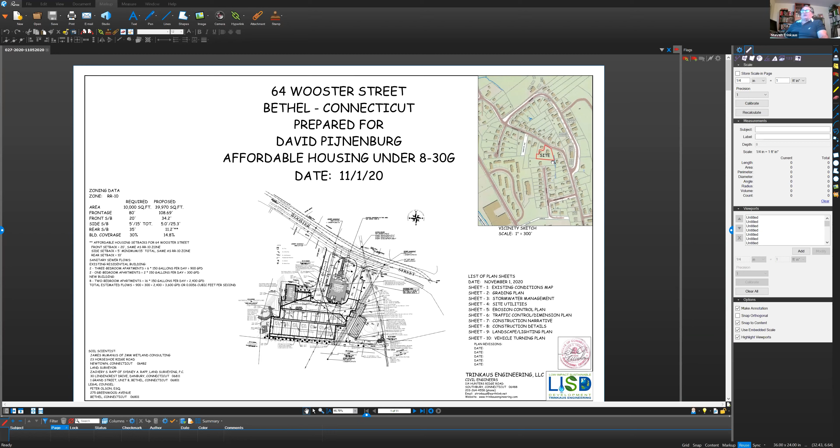Going to the existing conditions map, all the base surveying was done by Sidney Rapp Associates. Based on prior applications for the town of Bethel, we had provided the signed sealed electronic copy of the map. One of Wright Pierce's comments was to provide prints of that plan, which we're happy to do, along with a response to their comments and David's comments. So we have the single family house in the center northern end of the site. The garage is near the western property line. A driveway comes in to the garage and a little bit of pavement to the back corner of the house. The majority of the area, except for a little old concrete foundation remains, is lawn area.

There is a sewer easement that runs through the site from Wooster Street to a manhole west of the site. And that easement is as of record. There are some outcrops of potentially rock on the extreme northwest corner of the site. We had Jim McManus, a certified soil scientist of JMM Wetland Consulting from Newtown, look at the site to determine if there were any wetlands along this intermittent stream corridor. There are no wetland soils. It is simply the intermittent watercourse or drainage ditch through here.

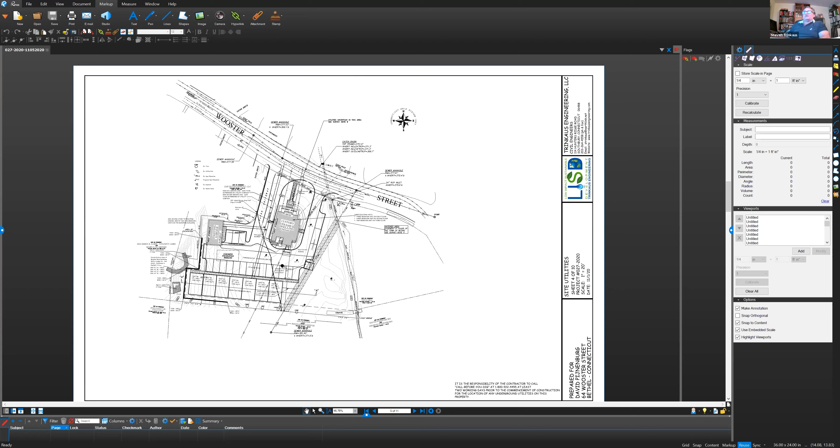With the sanitary sewer line being on the site, we're going to be running our sanitary lines, obviously, from the existing sanitary line at two locations, as that makes the most sense, instead of coming in from Wooster Street. We have a comprehensive erosion control plan.

The stormwater detention area is here. For the ease of reading, we didn't show it, but we have the Filtrexx sock below that. We have sock below the riprap outlet. There is also another sock along the 3 parallel parking spaces here. We have the construction entrance. We do have a soil stockpile that's up here just to the west, to the south of the garage area within the parking lot.

One of the comments, and we'll submit revised plans of this, was that around each catch basin there will be a silt fence. Only one of them was labeled. One of the changes of the plan is to copy the label to each of them, so that as the catch basins are installed, a silt fence will be staked around them to prevent sediment from going in them.

It generally does not occur because the top of the catch basin is 12 to 15 inches above the sub-base layer of the driveway. Even when you put the gravel in before pavement, you still have a 3 to 4 inch difference.

So it's always been my experience that we never get water into the catch basins, except what falls on them; we don't get it from contributing areas.

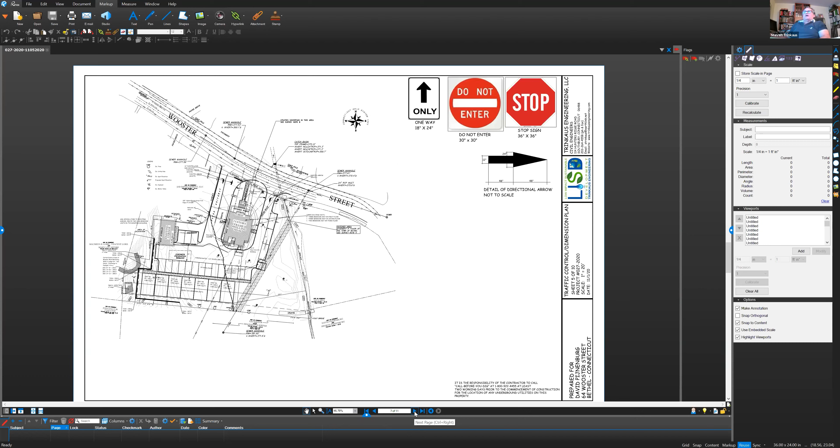We have a traffic plan, which is not the wetlands jurisdiction, so I will skip over this. Sheet 7 is a comprehensive erosion control plan that exceeds the requirements found in the 2002 guidelines for form and content, as far as all of the information, the construction sequence, seeding mixtures, maintenance schedules, plan objectives and principles, etc. This is pretty much verbatim the outline that's found in the guidelines.

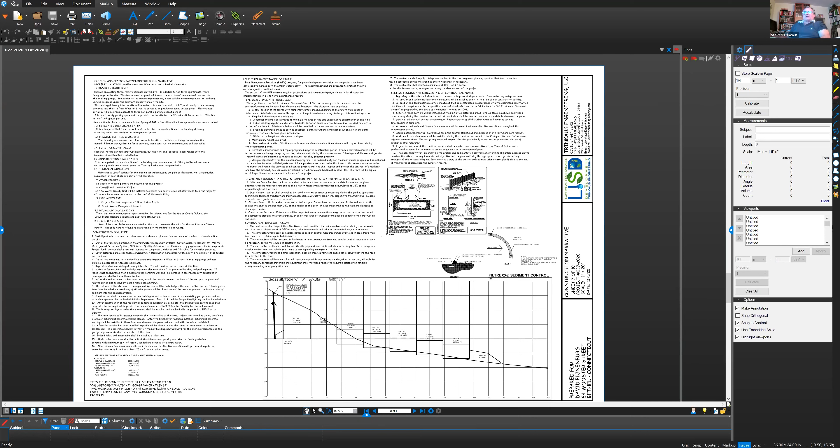We just have a cross section of the building units. They will be stepping down the hill because of the grade, and the parking follows that. The parking is actually a 6% grade, so it follows the first floors. And this shows the potential ledge or rock cut or retaining wall to the western side of the building. The grade would pitch from the building back to the base of the wall or cut.

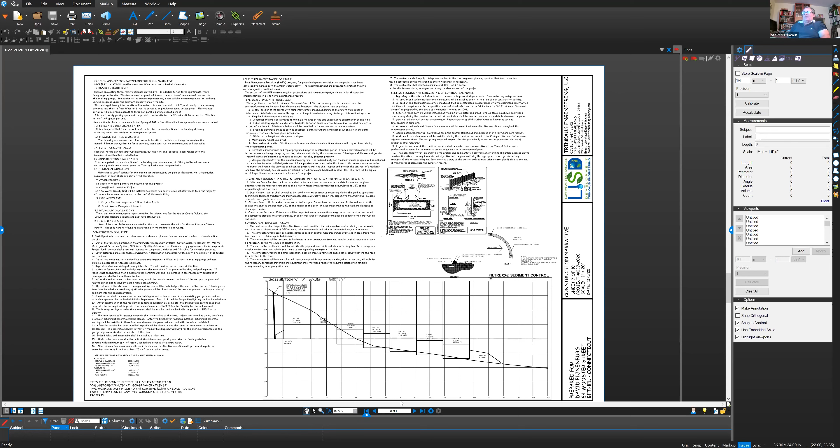There would be a curtain drain at this point, so any water from further to the west of the site would be picked up by the curtain drain and diverted around the building, and then discharged to the east of the building footprint as its existing groundwater.

So we have our construction details. One detail that inadvertently got left off, it was on the plan, but it wound up being on a layer that does not plot in AutoCAD, is the catch basins, which actually is sitting in here. So on the revised plans, I moved that to a layer that plots. I see it on the screen, but when you print it, it doesn't plot. So I didn't realize that it was on there.

This is the generic detail from ADS for their treatment systems. While it shows possible pipe diameters that this can accept, the pipe sizes are specified on the site plan for the in and out going into it. We have the detail of the Cultec system and our outlet structure, which is a manhole with a concrete weir wall in the center of it, and then the orifices are cored through the weir wall. So this provides easy maintenance for the detention of runoff for the outlet structures.

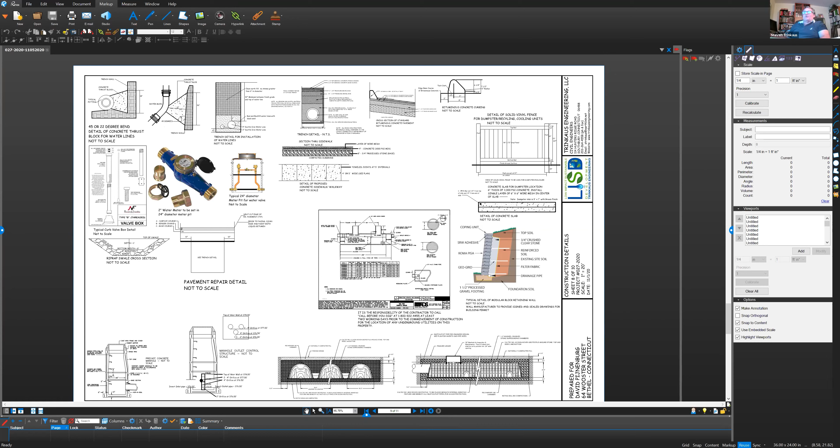But as we're treating, all the catch basins have 2-foot sumps, and as the ADS unit is treating the water quality flow, there really should be nothing that ever gets either into the Cultec system or into the outlet structure at all. We have a landscape plan.

Behind the building there'll be arborvitaes, green giant arborvitaes that grow very thick and dense. There's flowering plants, azaleas, and some pin oaks. One of Wright Pierce's comments was to put the abbreviations into the landscape table, which will be reflected on that.

We have bollards for just ground lighting in the parking area. There's no pole lights proposed here. There would be some lighting on the units above doors, but in the parking lot itself, they'd simply be bollards.

Sheet 10 is the vehicle movement plan, which again is not a wetlands issue. So I'm just going to go back to the stormwater site plan, which shows the majority of the information. As I said, we will have a written response and revised plans.

A couple of the general comments: we will add a snow storage area off portions of the parking lot here, which would be above the stormwater system. As the snow melts, it would go across the vegetated surface, and ultimately some of it would infiltrate into the upper soil layer, and the rest of it would flow through the grass, ultimately getting into the intermittent stream on this particular site.

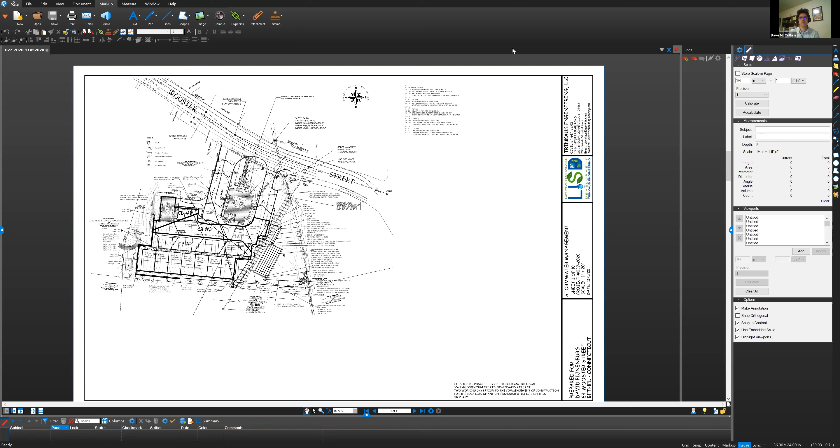Thank you. Thank you, Mr. Marcus. Peter, wrong name, sorry. David, did you have any comments or questions for the applicant? Yes, I have comments just in general, and I'm going to speak them both to the applicant and to the public. Mr. Trinkaus, unless you need to share your screen or continue sharing your screen, I'm going to stop your participant sharing. Thank you very much.

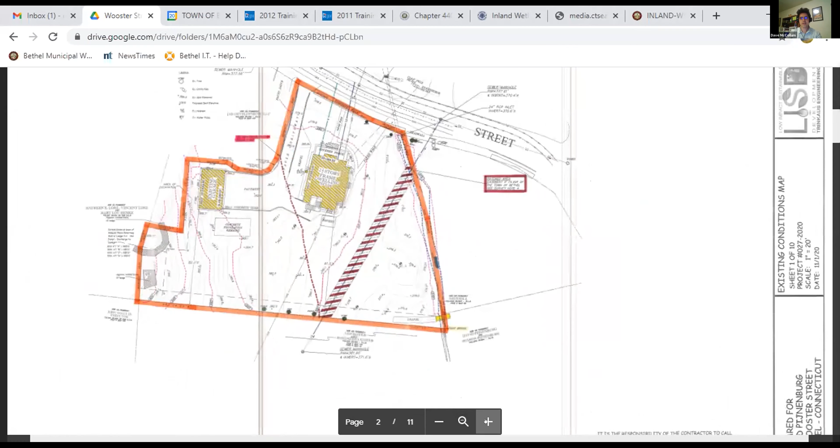So my comments tonight are going to be general in nature, with the consideration that we will be continuing this public hearing to wait for the applicant's response. I'm just going to touch upon some broad topics that I think we need to be mindful of. The first of which is, it's been mentioned that this is a small site. The property itself is a small acreage. It's less than an acre, if I'm remembering correctly. But I think what we're trying to focus on here with reviewing this application is the intensification of the use of the site. I'm just looking at the existing conditions right now.

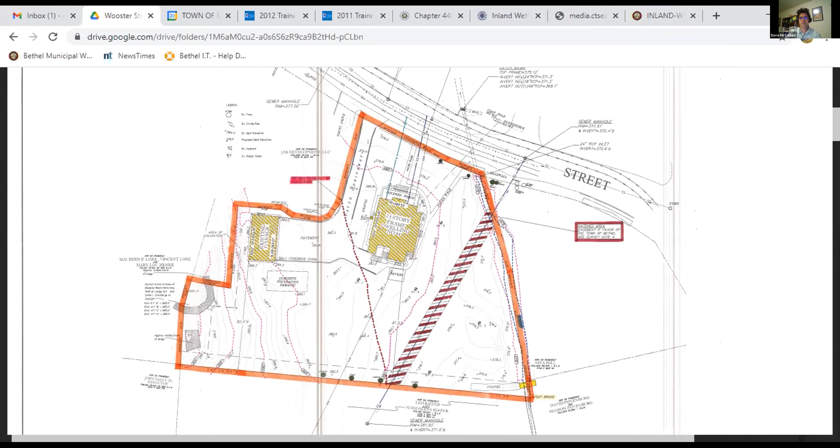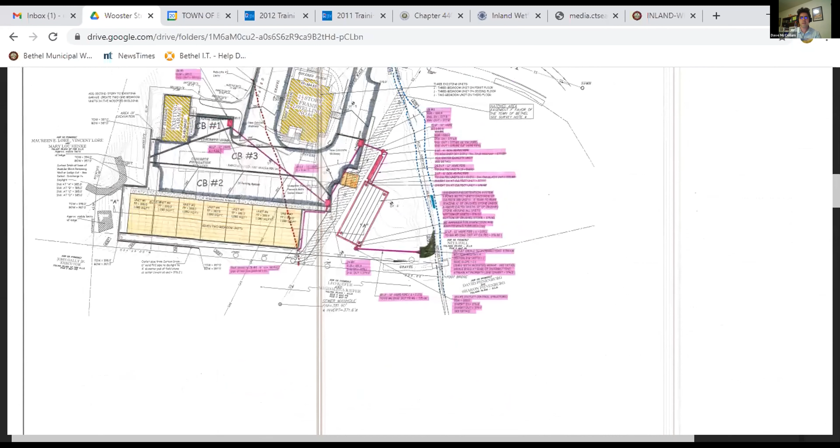There are some impervious areas that are highlighted around these existing structures, and I'll stand to be corrected at any time, but what's being proposed is you have these structures here with an increased area for parking and this structure. And one of the items that this commission is being charged to address is where ultimately the water from these impervious areas is going to be directed or discharged to. We do have a stormwater management system that's proposed. We do have an item that's said to have a treatment function. And for how the system appears to be designed, there is an overflow which would discharge into what's being called here a stream, an intermittent stream per these plans.

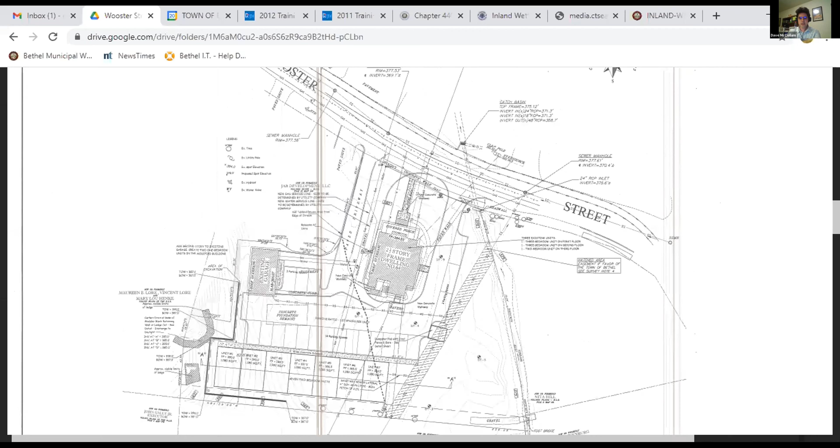I think we've gotten a lot of information so far from an engineering perspective in terms of how the system works and some other comments that have been addressed, such as the nature of the soils and the location of other items that aren't on these plans and what have you. But I think there are some other things that haven't been talked about yet, and that stems from the wetlands itself. First off, just to go back to a comment that was made by the applicant's counsel, this is a public hearing, and the reason why the commission thought this application was worth going forth for a public hearing was the proximity of the activity to the wetlands, especially with this component here, and the public interest.

I'm going to cite the Connecticut General Statutes under section 22A-42A subsection C. This is from the statutes themselves: the Inland Wetlands Agency shall not hold a public hearing on such application unless the Inland Wetlands Agency, and it goes into two other reasons, but ellipses, finds that a public hearing regarding such application would be in the public interest. I think with the public that is in attendance here tonight, that there is a public interest that has been calculated correctly by the commission.

And moreover, that speaks to the fact that we have this activity here, and there's some information that's still undetermined at this point from a soil scientist's perspective as to how this is going to possibly impact this, or whether it would impact this. Not to dive deeply into my comments, but we need to have documentation from the soil scientist that says what's going to happen with all of this engineering over here on this portion of the site with respect to this.

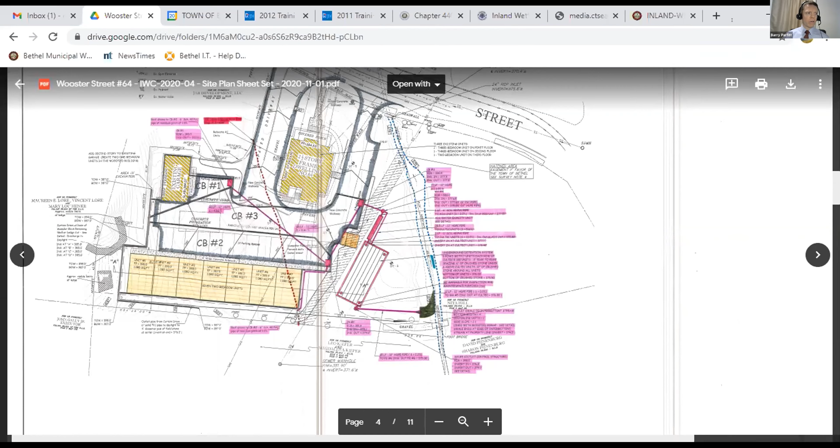If I may share my screen, Dave? Let me try. Yes, you may. My apologies. And Barry, I don't know if it's my ears, my computer, or what, but if you could turn your volume up just a little bit, that would be very helpful. Sure, thank you. Okay, hopefully this is better. We'll just review a few of the highlights from our comments. My screen is sharing, once it's visible. Yes, it is, Barry. Okay, thank you.

Yeah, just wanted to highlight some of our comments on the engineering review. First of all, we do recommend to the commission the requirement of showing structures and other features that are about 50 feet outside the property. That was one of our general comments. There are a few structures around the property. If we look, I can draw this in here. There's a structure here, another one down here, another one over here somewhere. So showing those structures and other features we highlighted in our comments that are in the requirements would give the reviewers a better sense of the surroundings and what features are just outside of the property.

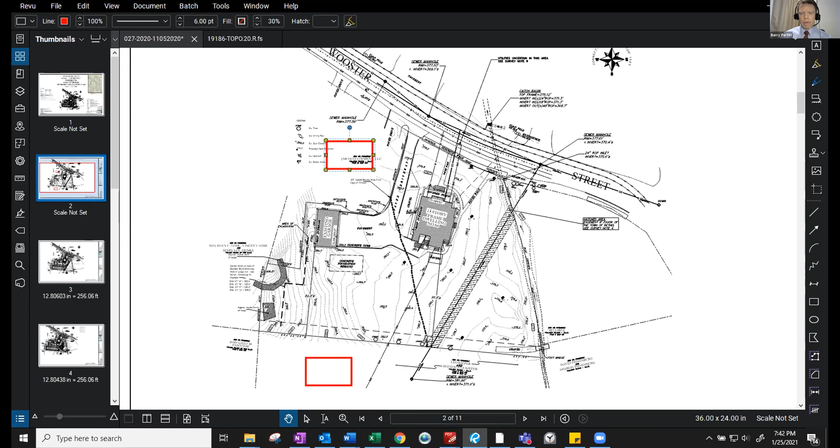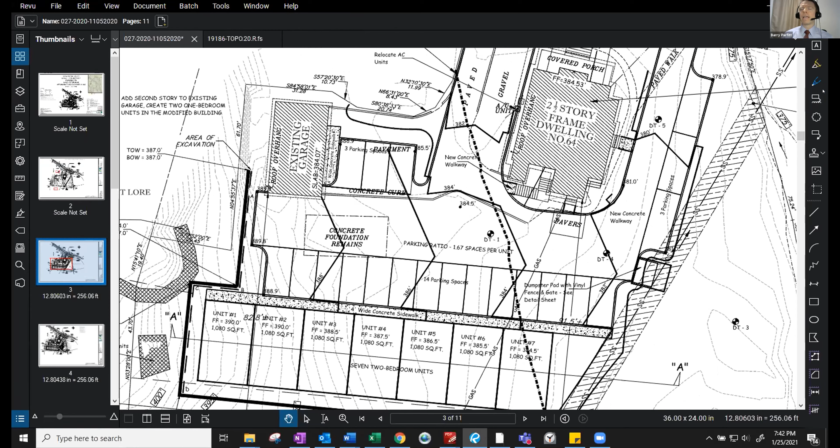Another comment we would like to recommend is the clarification of items that are proposed versus items that are to be removed. For example, we could look at the next sheet here. It is unclear sometimes. It seems obvious that things will be removed, but it's not really spelled out on the drawings. For instance, we have a concrete foundation here that is shown as remaining. I'm sure it's being removed as part of the project, but it's not noted as such. Concrete curbing noted across the parking lot, pavers over here, and so forth, make it confusing to look at the drawings as to what is proposed and what is not. So that was a general comment as well.

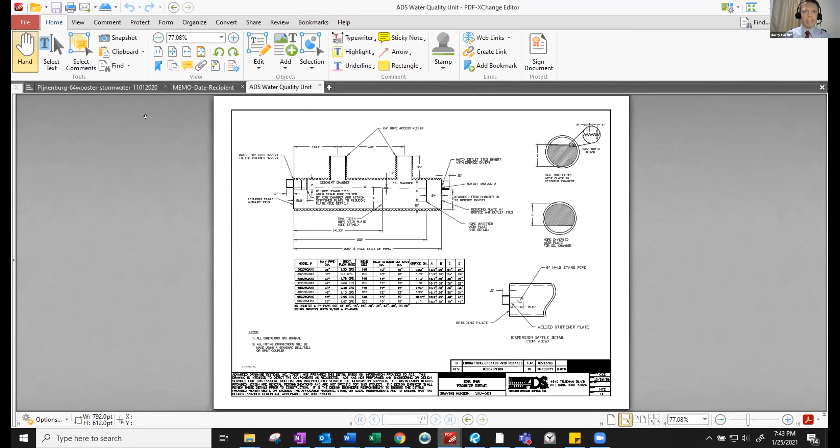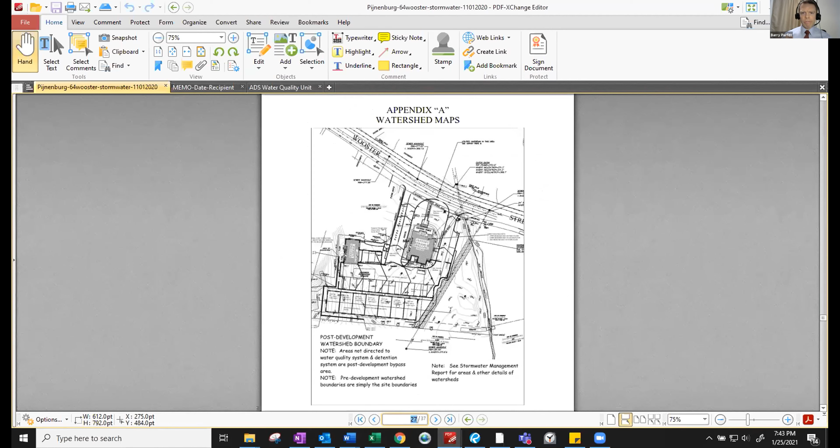Moving on to the stormwater comments, we reviewed the stormwater calculations. However, to complete our review, we don't have a clear pre-development and post-development subcatchment map. I'll show what we do have here as part of the report, I believe on page 27. This was what was submitted, but it's unclear from this map what areas are the proposed subcatchments and the existing subcatchments. It's noted there. However, to really review the HydroCAD results and see what areas are being referred to, we are asking for a full-size pre-development, post-development subcatchment map that will identify the different subcatchments used in the HydroCAD report. This will also help us understand the flow paths and so forth.

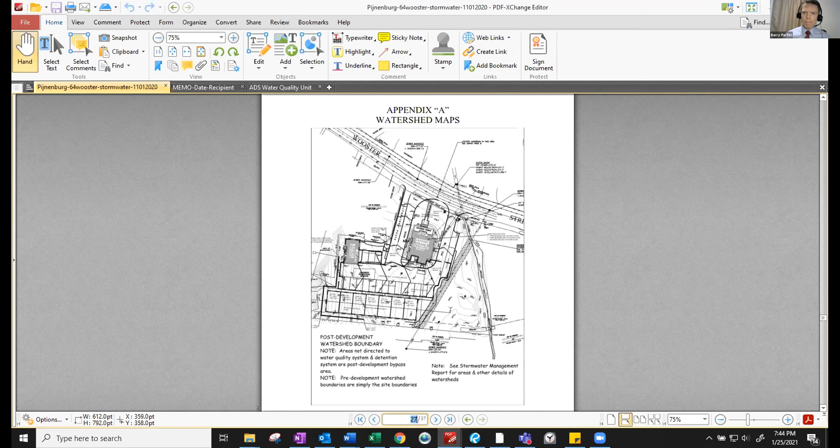Along with that, regarding the subcatchment areas, we believe that just the area within the property is being considered as part of the watershed. However, we highlight concern of perhaps increasing this area if the area off to the west is actually contributing flow across the property and making its way into the stormwater management system. That may need to be considered as an additional watershed or catchment area that should be included in the sizing of those components of the system.

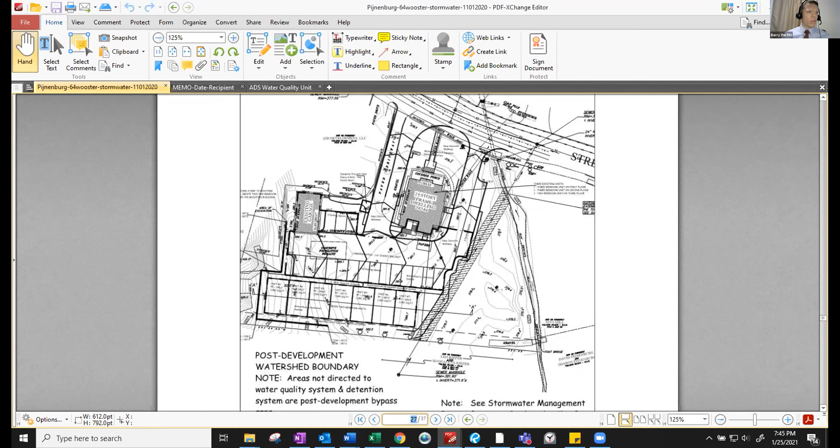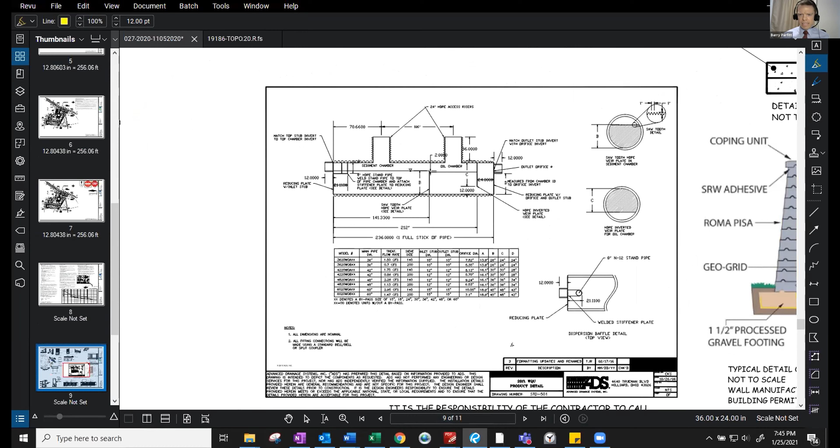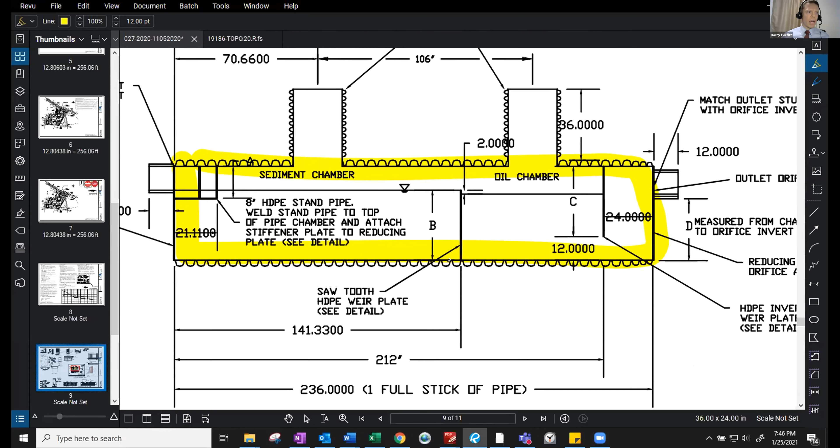Another point regarding the ADS water quality unit. Let me go to sheet 9 here. As Mr. Trinkaus did note, the pipes coming in and out of the unit are noted. However, in this detail from ADS, there are multiple sizes for this unit, as shown in this table. The main pipe diameter of the unit can range from 3 feet to 5 feet, and that is the main component of the ADS system. So we'd like to know what size was selected. We didn't see that in the report or the drawings, and also how it was selected, because the flow rate being treated can dictate how large or small this needs to be sized. Also, the weir size inside the unit all have an influence on what size unit is selected.

And regarding the removal rates, we did note the differences between UNH and ADS. And yes, as we had noted in our comments, a reference to or providing a copy of those results or how they determine those results would be good, because we did include in our comments a copy of the ADS's brochure with the removal rates that they are using as a manufacturer.

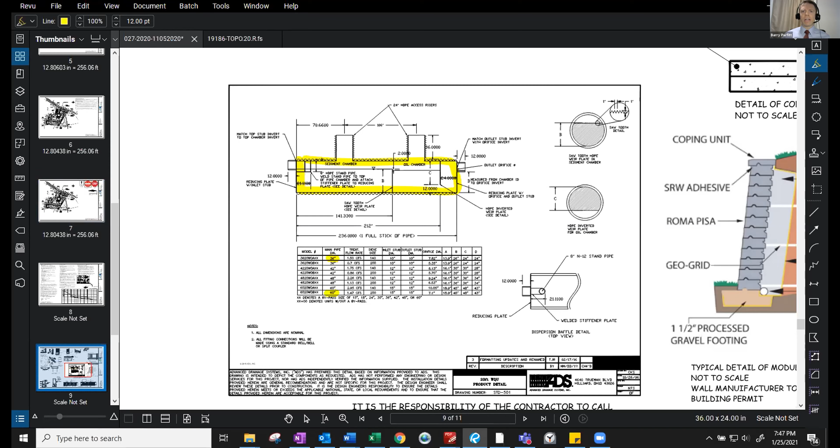Regarding our comments regarding the sediment erosion control narrative, there is a sheet here for the narrative, as Mr. Trinkaus had pointed out. We are asking basically for more site-specific information that would be included in the narrative, such as the area of disturbance relative to the erosion and sediment control dates, planned dates for the project ending and starting time and so forth. So those are just some high-level highlights from our comments, but we'd be happy to discuss any additional comments from the commission or the wetlands agent.

Thank you, Barry. I'm just going to jump in real quick, if you don't mind, because I have one more thing I think is important to note for the record before we continue on with the responses and or other comments. In terms of existing conditions and what's out there, I think it's important to note that while the commission did conduct a site walk of the property on December 5th, there has been some change in the site's conditions since we were last there.

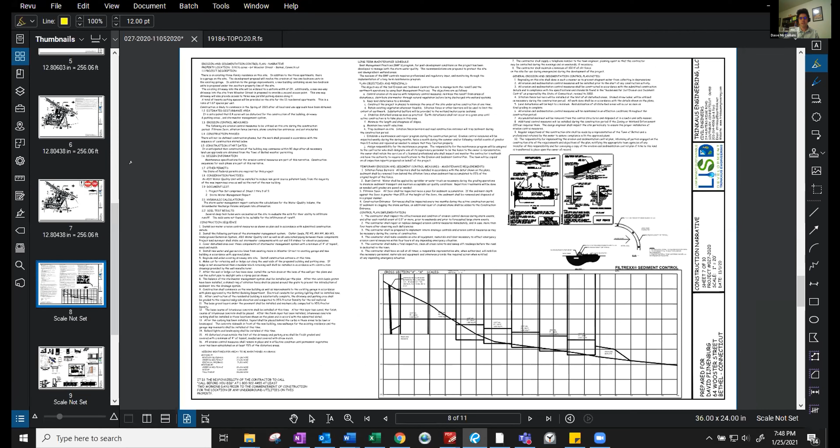Barry, if you don't mind, I'm going to commandeer the screen briefly. Thank you very much. Of course, no, there we go.

This photo, or the photos that I'm about to show, were in the Google Drive, and they were placed there before this past Friday, and these photos show a difference from what the commission observed in that there has been mature vegetation that has been felled and removed from the property without anything from the commission authorizing the applicant to do so. And this is what I'm saying about having the information that the commission needs. Regardless of where it's coming from, the commission needs to be aware of what's going on, and more so, the applicant shouldn't be taking any actions without giving the commission that information.

In terms of how long ago this activity happened, or the duration for which it took for these trees to be felled, I'm not so sure. But I'm hoping that's part of what the applicant would clarify for us. It's just more information that the commission will need for their decision. This activity, I don't think, should have happened in the first place without having the commission be made aware of it as part of their activities. And like I was saying, I look forward to what response is given by the applicant either tonight or when this public hearing is continued. And that's all my comments I have for now. Thank you. Thank you very much, David.

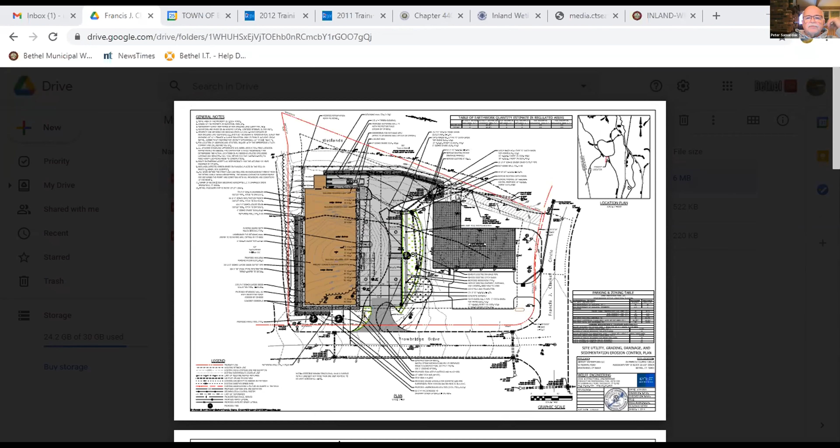Can everybody see my screen? Yeah, I can see it, David. Okay. Dave, can you bring that up just a titch? Yeah, I'm going to zoom in on that. Thank you, Lou. Is that better? Like, much. Okay, great. A tidge? What the heck's a tidge?

So what we have here is Francis J. Clark Circle and Trowbridge Drive. This is the site, 25 Francis J. Clark Circle. You'll note that there's a building and an existing parking area here that's been recently installed, as well as an existing parking area that's denoted by this dashed line here to the rear of this structure. What's being proposed by the applicant is for this parking area upslope of this existing building to be modified so that it is more rectangular in nature, and for it to serve a proposed independent structure here, which roughly comes out to 13,000 square feet, if I'm remembering my numbers correctly.

This building, a portion of it is within the regulated upland review area. The wetlands from which that area stems are off to the north of the property here, if I have my bearings correct.

Along with this building, we have a portion of the parking area that's proposed to be within that regulated upland review area, as well as a portion of the stormwater management system. There is going to be some grading from what I've read that's going to have to occur on this property, some excavation and some fill. I'll try to give some numbers real quick on this without getting too far into the weeds.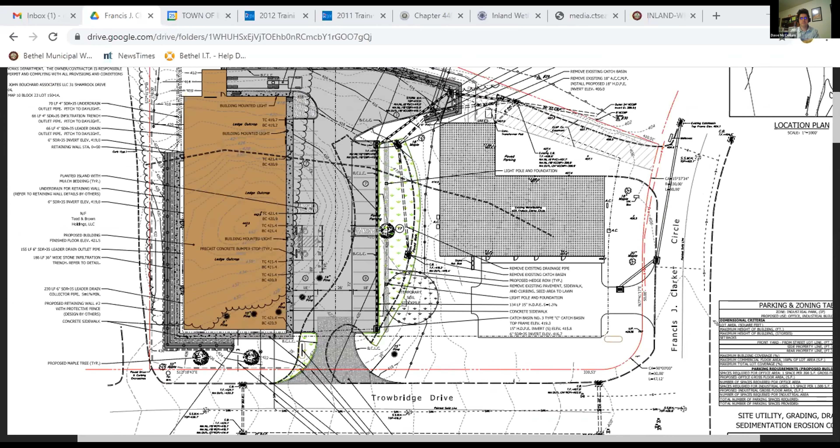created by this building. If the commission deems this application to be in the public's interest, I certainly wouldn't dissuade you from that. But as part of us accepting this application, we would need to decide what process we would go through to do that. So if you want me to, I can scroll through the pages here real quick. If you happen to have it handy with your Google Drives or as hard copies, I can take a few minutes for you to go through them, and we can come up with a consensus for what we do with this.

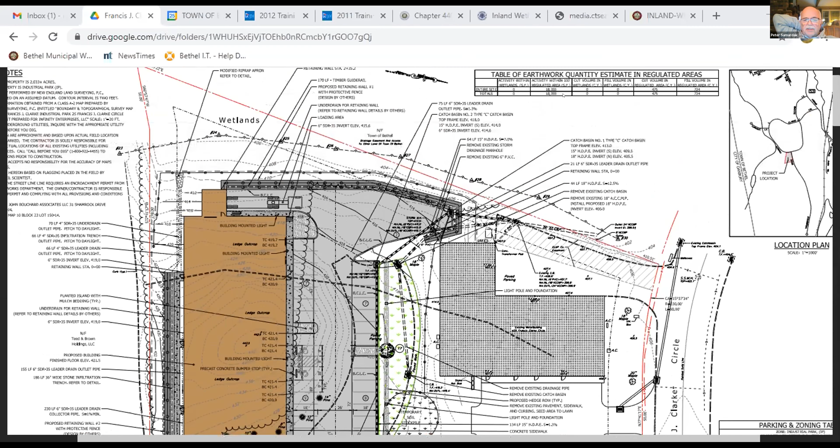Hey, David, didn't we do this? We did the site walk on this, and I don't think we found any major issues. And where it is now, I don't think it requires a public hearing. Maybe we could just accept this as it's submitted, with the additional piece of plan they're supposed to come to us with. Peter, I may be confused, but I believe this is a new and distinct site from the one we did the walk on in the fall.

That's correct. I'm going to bring that up now so that the commission can get their bearings for where we are and where we have been already. I'm just going to do it via Google Maps here. Where are we? Please bear with me. A little farther south. Okay.

Okay, so the application that the Inland Wetlands Commission approved previously, late last year, was for 17 Francis J. Clarke Circle. I believe that would have been for this building here, further up Francis J. Clarke Circle. What has been submitted for us tonight is this property here that I have my cursor circling over, 25 Francis Clarke. That's a different parcel entirely. We have not been out there. It's been some time since this parcel has been before the commission. So I just want to make sure we don't get those two mixed up.